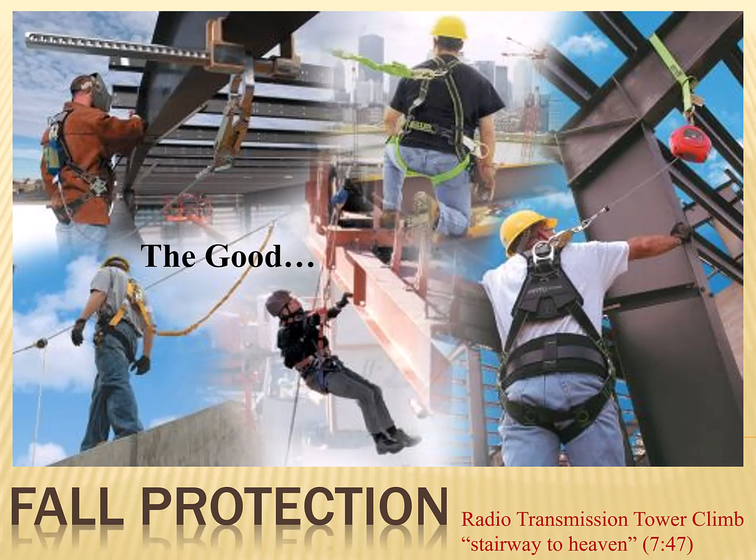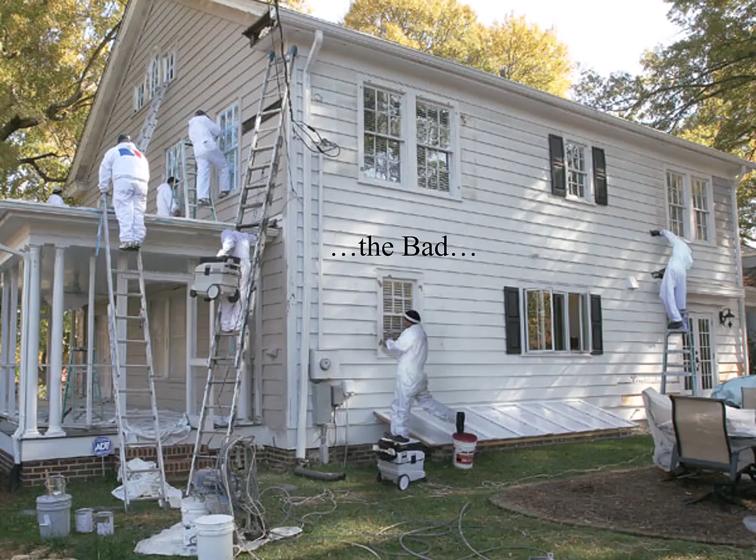Well, here we're dealing with fall protection. This first picture is showing you the good, basically proper personal fall arrest equipment being used. And here we've got places where ladders are not particularly being used properly.

We've seen this picture before, but there's lots of things wrong in this picture. We'll deal with this picture in a little more detail when we get to ladders and stairways.

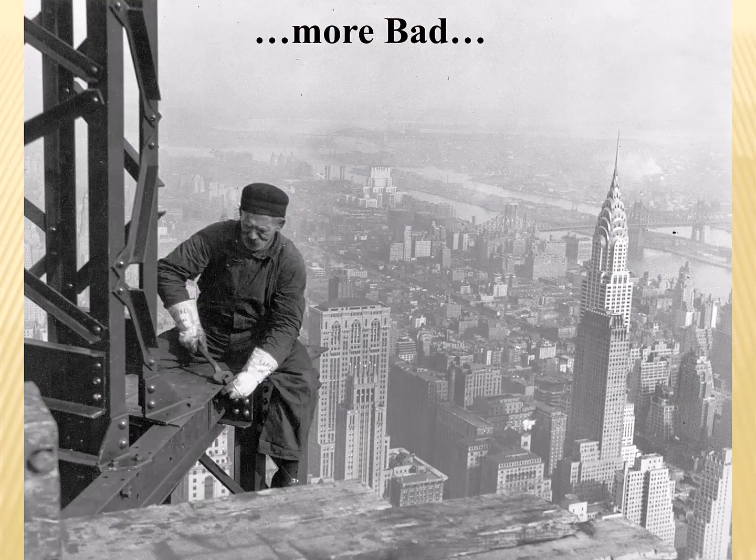But here's a fella from around 1931 sitting on a corner of the Empire State Building. And again, no fall protection, no hard hat, no real personal protective equipment beyond maybe some kind of basic boots that I'm sure were not steel-toed, and some gloves. But ultimately, if you're working at elevation, your tool should be tethered so that if you drop the wrench, it doesn't land somewhere down below, killing somebody or hurting somebody.

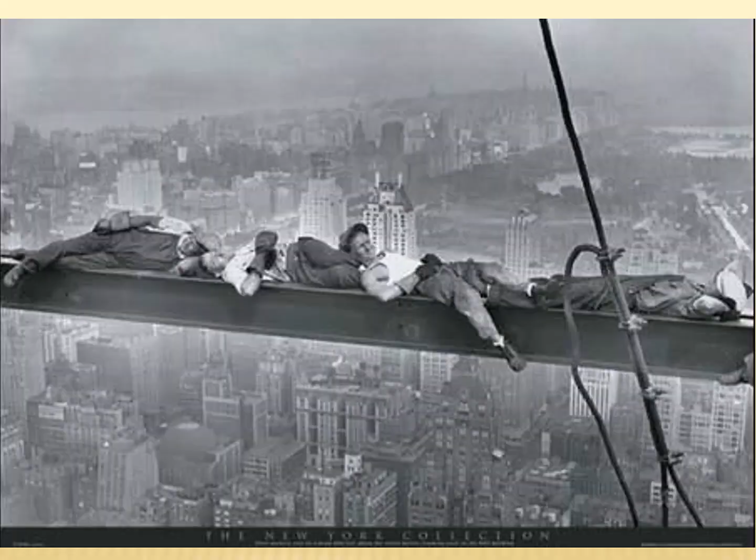But back to the people back in '31. Here they are hamming it up again by pretending to nap on that girder. But at the same time, there is no net, so there is real risk there.

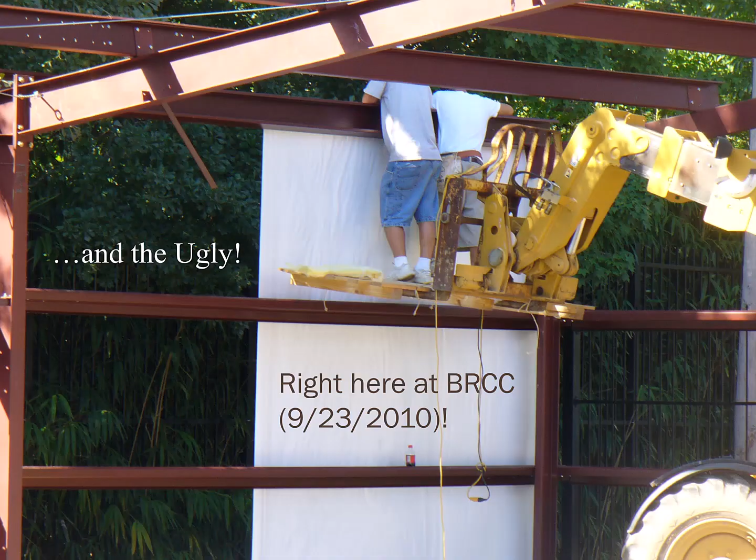Okay, so things have changed a little bit since then as far as our understanding and best practices dealing with occupational safety. But here, back in 2010, when they were building a little steel building at the south end of campus, they didn't seem to have caught any of those lessons. So they're using safety zip ties, if there is such a thing, holding that pallet on forks. That's not a proper lift for human or personnel lift, to just use a pallet like that.

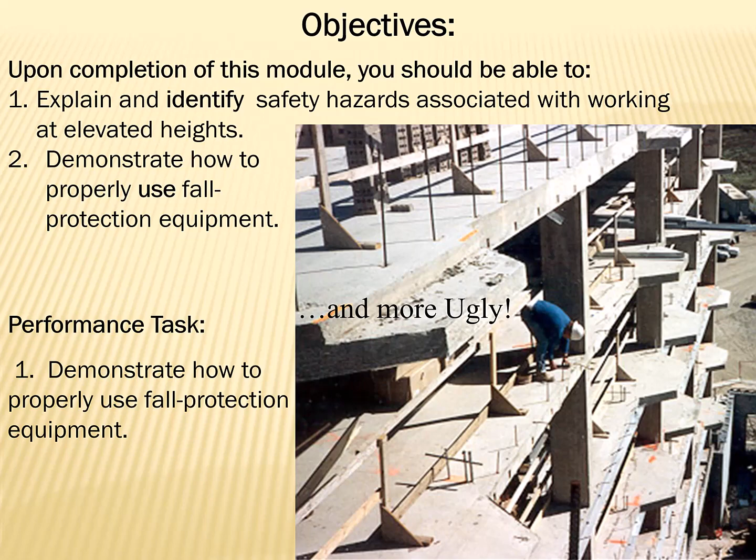And here's an OSHA file photo where someone is on the wrong side of the guardrails, but the guardrails aren't complete. The mid-rail is not installed. Maybe he took it off, for all I know, to work out there.

But anyways, falls are the leading cause of fatalities in construction. These are the top four types of classifications of fatalities in the construction industry, where falls are more than a third, at about 35% of the fatalities in the construction industry every year.

Being struck by an object or something, that's about 10% or so, and electrocution is third at around 9%. Sometimes they crisscross over, and sometimes electrocutions are second. But generally we consider struck-bys to be second, electrocutions to be third, and then the distant fourth is caught in or caught between.

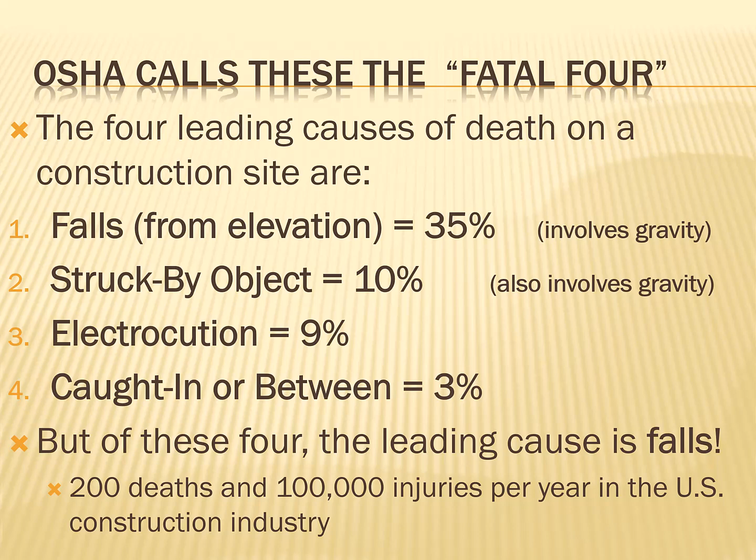So we've talked about the struck-bys and the caught-in-betweens already. Now we're going to falls. So that's the theme here. Related to falls, we'll also deal with ladders and stairways, and then scaffolding, because they're related to falls or working at elevations. So we'll move to that topic after this. But first of all, dealing with falls.

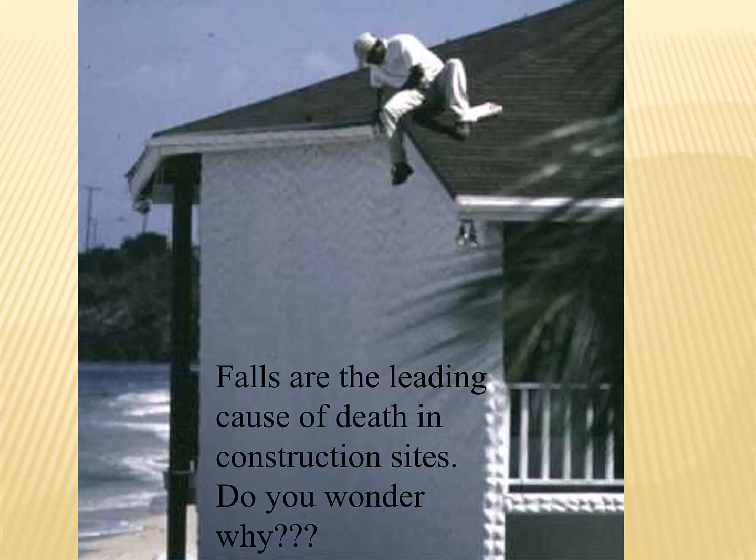So this fella, and I've done it, I've been here before, where you get up on a roof, you usually need to get somewhere to do something at the edge, but he's relying completely on the friction of his butt with that roof. And that's just not a good situation to put yourself in. You've got no way to stop yourself if you start to slide off of that roof, and there can be grit on the roof, sandy particles from the roofing materials that literally act like little ball bearings, so you can suddenly start sliding on roofs pretty easily.

I know from experience. So most fatalities occur when employees fall from open-sided floors and through floor openings in general. So when you've got any kind of floor openings, and in residential construction, it happens all the time, where you have a floor that you frame up an opening in for stairs, a big stairwell opening. And then you finally go and build the stairs or install the stairs. But even then, you can fall through the sides around that thing because you still haven't maybe built walls around that opening or guardrails and such.

So stairway openings are a particular danger, that you can forget the opening is there and then accidentally step right through it. So we've got to put guardrails up around stairwell openings in construction sites until everything is properly built in the way it's supposed to be.

And there's other things that can happen in commercial buildings. Besides stairwell openings, you can have elevator shaft openings where you're going to put the elevator shaft eventually. You can have other kinds of openings for building services, like ductwork and plumbing, where there's openings in floors for stuff like that to pass through. And that's another place where you can fall through, or at least trip. If it's not big enough to be considered a floor opening that a person can fall through, it can be considered a floor hole that can trip you up and still get you hurt.

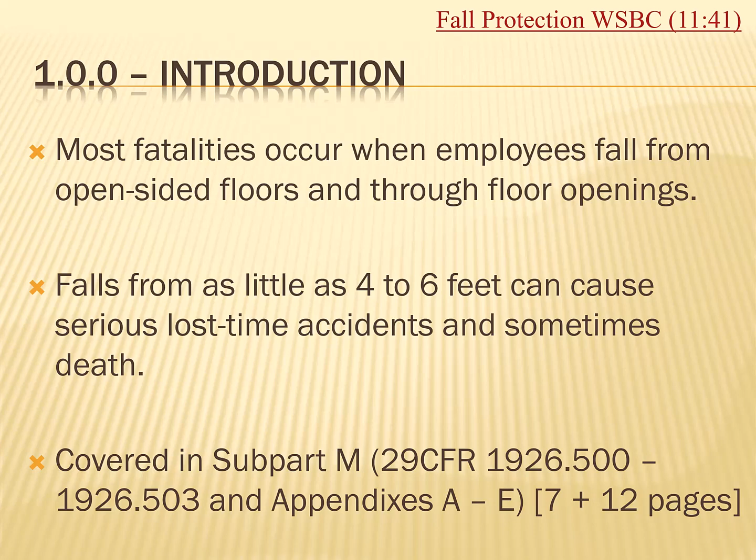It's 29 Code of Federal Regulations, 1926, because that's construction, and the decimal place is the important part to remember: 500 through 503. That only represents about 7 or 8 pages, plus maybe a dozen pages of appendices with tables and charts, so it's not a huge section, but is maybe one of the most important sections within the construction standards.

You can get somebody who was just scraping away here, doing mindless work and humming a happy tune. Maybe he was doing this on the ground floor earlier in the day, and he could literally forget that he's up on the second floor after lunch, get a little sleepy. You could literally step off that floor. It doesn't seem possible, but when you're right next to something, you just don't think.

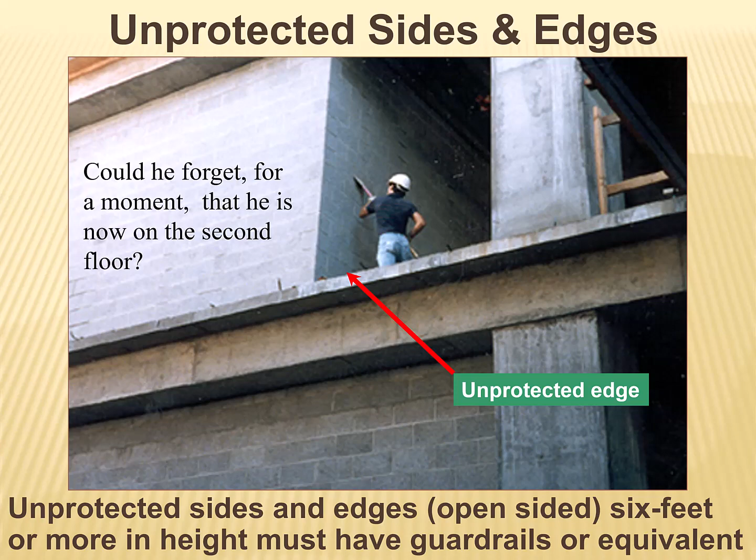So, yes or no, maybe it was the right thing to say: no, you cannot be working up here without guardrails or being tied off. He's too close to an unprotected edge.

There are a lot of sections that have fall protection notations, or special exceptions and special rules for different areas besides subpart M. We've got the steel erection section, maybe the biggest area, subpart R, which deals with structural steel erection. That's 1926.760, the main section. And those are the craziest exceptions.

If you step down two sub-bullets to deckers, you see it says up to 15 feet for deckers. They're allowed to work up to, if you're putting decking down on an elevated level as you build a structural steel building—you eventually have to put decking down—they're allowed to work up to 15 feet or one story, whichever comes first, without fall protection.

I mentioned a controlled decking zone—we'll come back to look at that again, CDZ. So when you see CDZ, that's the abbreviation for controlled decking zone. But the bullet above that little sub-bullet is talking about the connectors. The connectors are those that connect the beams and columns together to make the basic frame that the deck goes on, and they're bolting these things together, then maybe coming back and welding them.

They're allowed to work up to 30 feet, or 2 stories, whichever comes first, without fall protection. That's crazy talk—there's no way you can safely fall 30 feet and expect to get up and walk again, at least anytime soon.

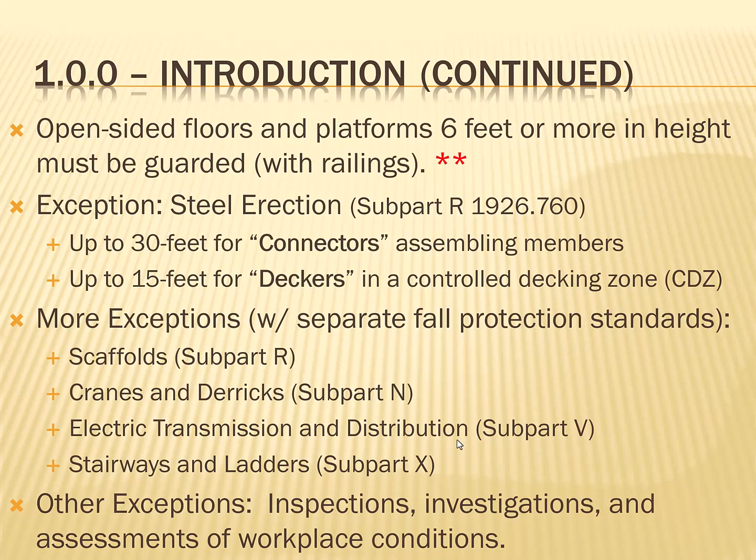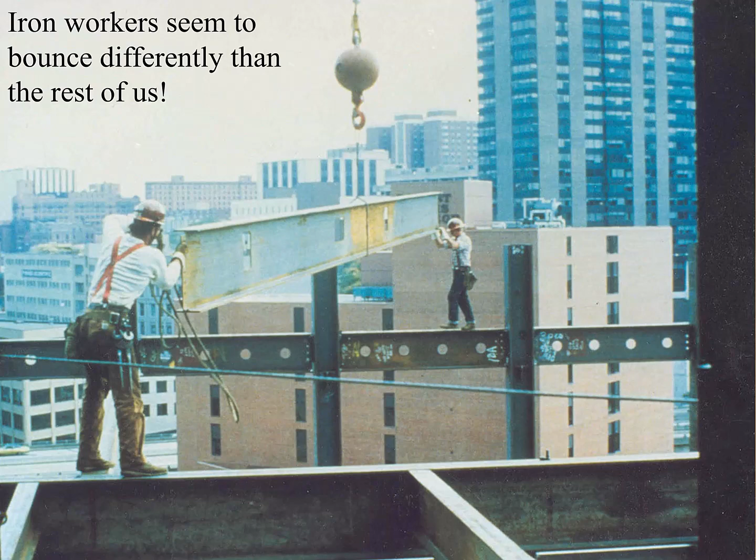Let's see, here's the next page. I'm looking at a couple of iron workers, and at first I thought they had personal fall arrest systems that just weren't connected to anything, but no, those are just suspenders holding up their tool belts. So they're up quite a ways, and they're not using any fall protection of any kind.

So you're at risk of falling when working on scaffolding, on ladders, or around leading edges, probably of decking. Typically when installing decking, the edge where you keep adding more sheets of corrugated steel decking or plywood sheets on a residential roof or deck—that's the leading edge. Or with ramps and runways: you start at ground level and gradually go higher, and next thing you know you're at an elevation where a fall could hurt you or worse.

Floor or wall openings become a hazard, as we talked about a moment ago. Roofs you can fall off, or openings in roofs, for instance—just like floor openings, there can be roof openings such as where the chimney goes. You don't have a chimney to begin with; you typically have an opening for the chimney, then you build the chimney up and out. There can also be excavations: you start with a field that's nice and level, and once you dig a hole, you've got a place you can fall into.

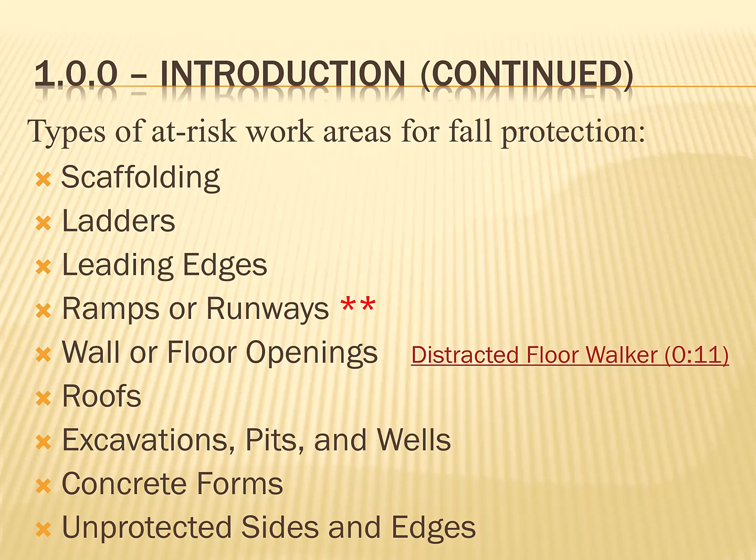Or pits or wells. Concrete forms are a common issue needing fall protection. Tall wall forms—if you've dealt with little curb forms for slab on grade, you're not at any elevation. But when you start building an 8-foot, 10-foot, or 12-foot concrete wall form, you've got to get up there with scaffolding to pour the concrete. But on plenty of residential sites and some commercial sites, people climb up on top and walk like a circus act on the wall form to pour concrete, kind of hanging onto the concrete pump or something.

Here's a ramp, and as you climb up, this one has a proper toe board, top rail, mid rail, and toe board on it. For a construction site, this is acceptable. It might not be acceptable for the general public, but for people working on construction sites, OSHA's basic rules allow this.

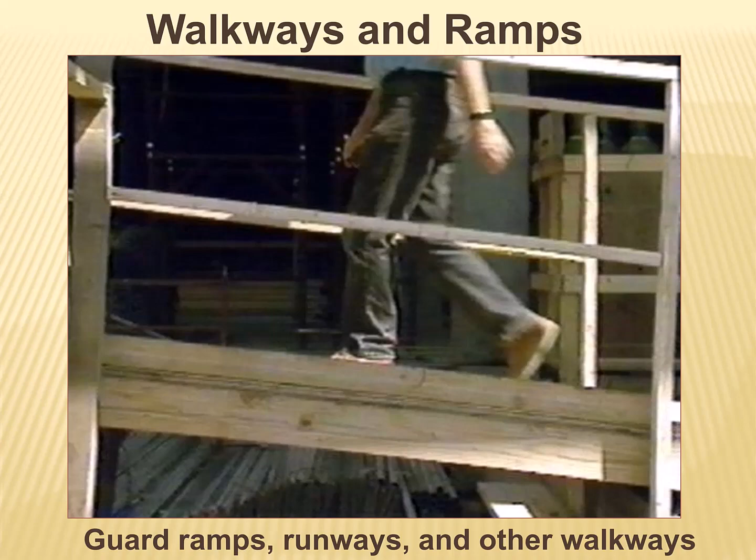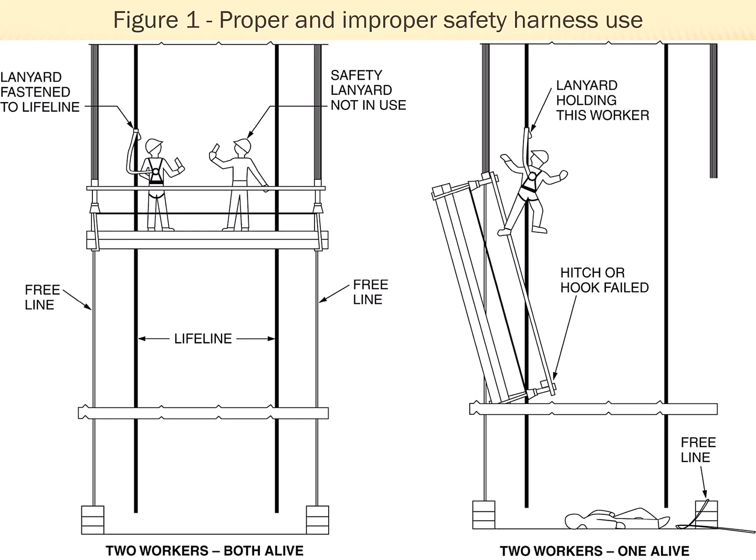That's shown in this little drawing. What I'd point out is it actually happened here in Baton Rouge back in 2013 at Our Lady of the Lake Hospital. They were building this tower you see here in the background, installing some windows still, and the suspended scaffolding they were using to install the windows failed on one side just like that.

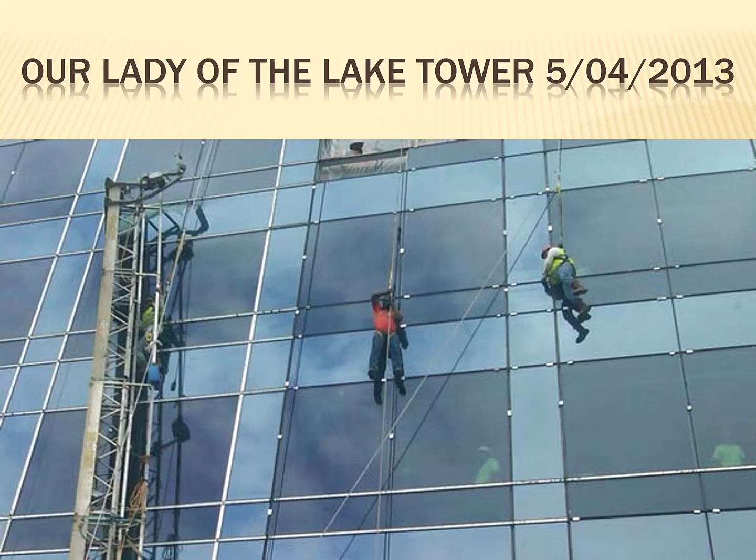So here it is, you see it dangling. You don't see any people because this is the last picture they took after they rescued the three people who were on this. Here's a picture of the three people - two are out in the open, dangling on their lifeline, their lives saved because of the personal fall arrest system, the safety harness, the lanyard attached to a lifeline rope. The third person is tangled up, able to be a bit more comfortable standing on portions of what's left of the suspended scaffolding.

I'll talk about this in more detail when we get to the scaffolding section. But one thing I didn't notice for a while when looking at these pictures is their buddies are peeking through the windows at them from inside the building. I didn't notice that until later - you can kind of see them all peeking out here. But anyway, they were all saved.

There's something called suspension trauma. When you're dangling in a safety harness, the pelvic straps tighten up on your legs kind of like a tourniquet, and toxins can build up in the pooled blood in your legs and clotting can happen. You're particularly at danger once they rescue you, where suddenly that blood can flow through and cause a stroke or shut down organs and all kinds of things I can't know more details about since I'm not a medical professional. But suspension trauma is a very real and serious thing.

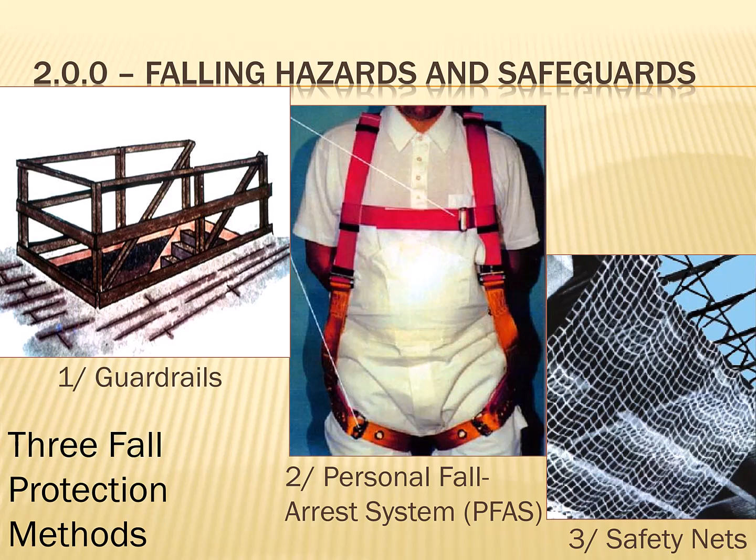So let's look at guardrails first. The standard height of a guardrail is 42 inches - you need to know that number. The mid-rail is half of that, so 21 inches. The toe board needs to be right at the ground, within an 1/8 inch really, no gap - you want it tight to the ground. Toe boards must be at least 3.5 inches tall, which is the height of a 2x4 laid on its side, I guess you could call it the height.

These guardrails have to be strong enough that you can push or pull at the top rail with a force of 200 pounds and nothing comes apart. Remember a few moments ago I mentioned how when you're tied off for support, you must be tied off to something that can support 5,000 pounds for each worker attached to that tie-off point. Meanwhile, I'm talking about 200 pounds here - but if you actually try to push on a wall with 200 pounds of force, you'll be surprised how hard that is to do.

Pulling, you might be able to do it if you can push against something and pull. You might be able to pull something apart, but even that's a significant force. So it's a stronger force than it might initially seem.

Now, this open guardrail system is only meant to protect you. If there's people working down below you, then this needs to be screened in so that there's no openings, no holes in this guardrail. And all your tools have to be tethered, tied off in a way where they can't drop on somebody below. Materials included, tools and materials.

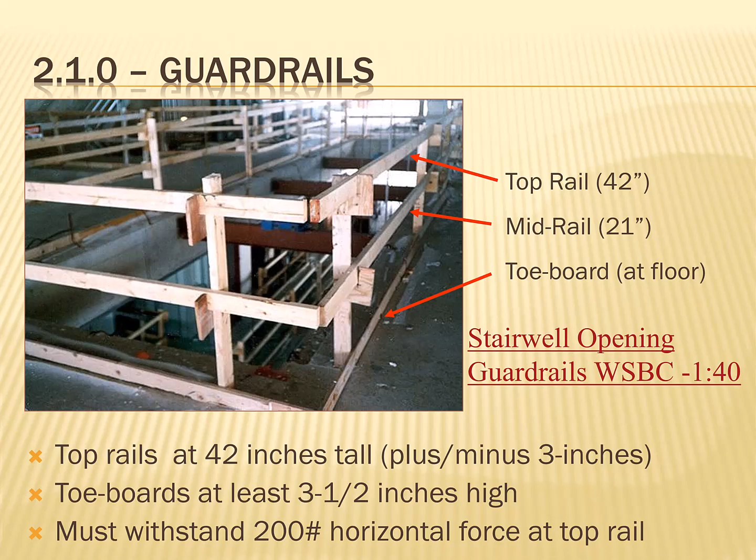Okay, so here's an unprotected edge, and this guy cannot be working on this deck. Now, I know I would feel quite comfortable to work on this deck. You're very comfortable with heights, but sometimes you can be irrationally comfortable with heights. From your experience of just never having any trouble, but it only takes one bad day, one bad moment where this guy forgets where he's at and steps off that edge.

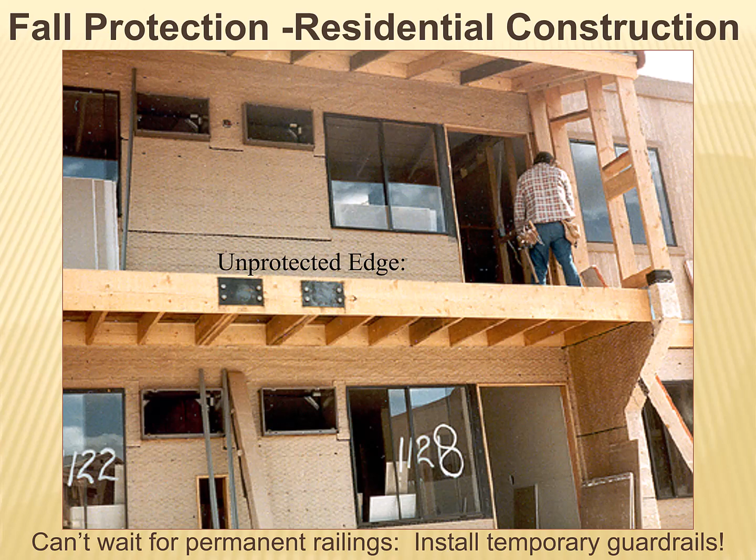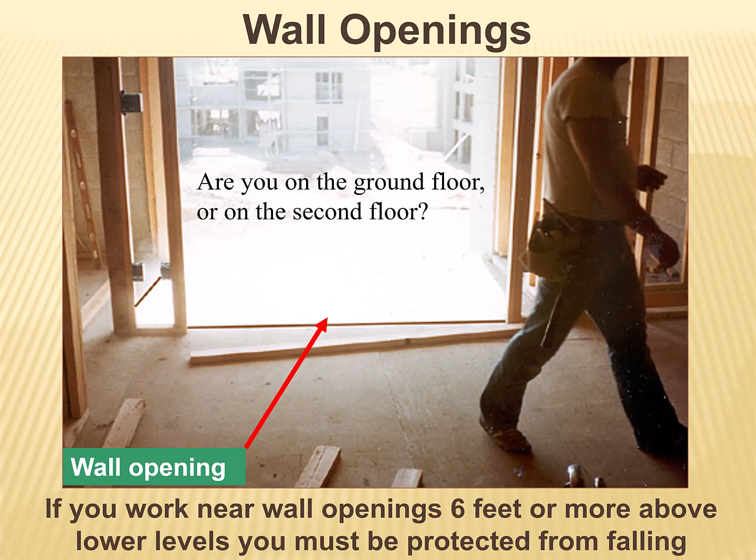Because, you know, if he's inside, you look at this, you might have been on the ground floor all morning and you get upstairs on the second floor now, and with the glare on your safety glasses and stuff, you may still think you're on the ground floor and forget that you just climbed up. All the apartments look the same, you know.

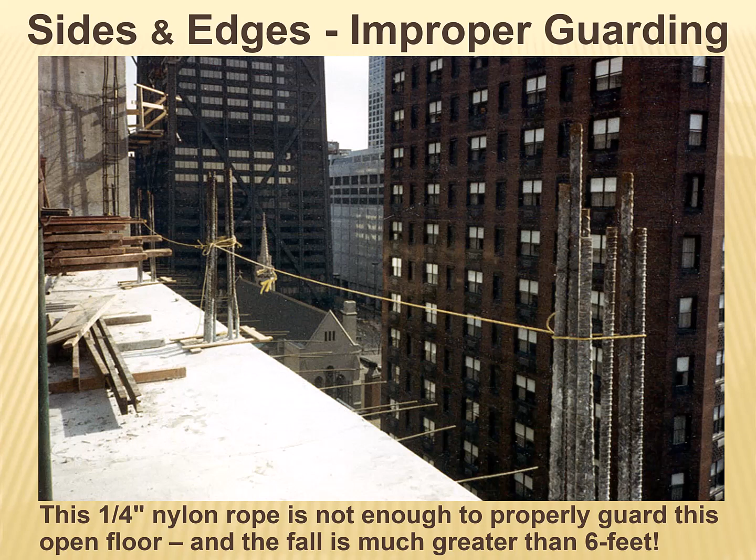Okay, this is an OSHA file photo where OSHA didn't like this 1/4-inch nylon rope being employed as a guardrail. It's a long ways down, and that's not really a guardrail at all.

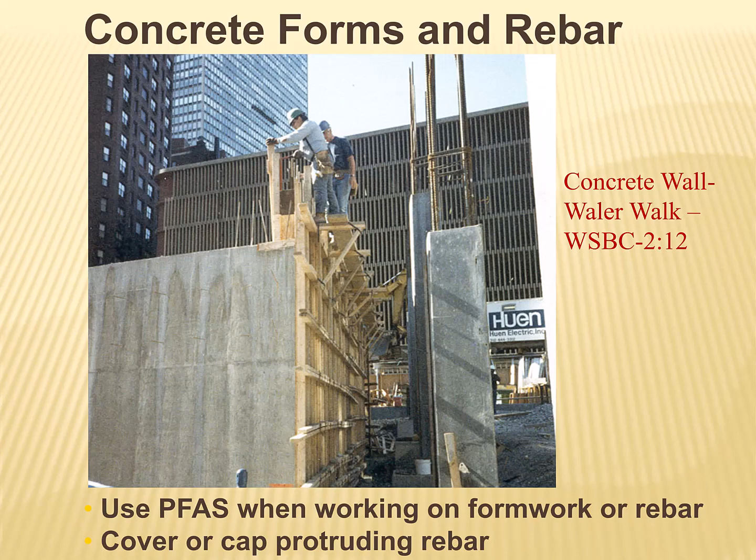And this wrinkled the brow, I guess you'd say, of an OSHA inspector, because this is not a proper scaffolding system. Yes, it looks pretty good compared to some kinds of things that I've had to climb on for concrete forms in my youth, but no, it's not considered effective guardrails. There's something to hang on to maybe on one side if you're lucky, but it's not adequate.

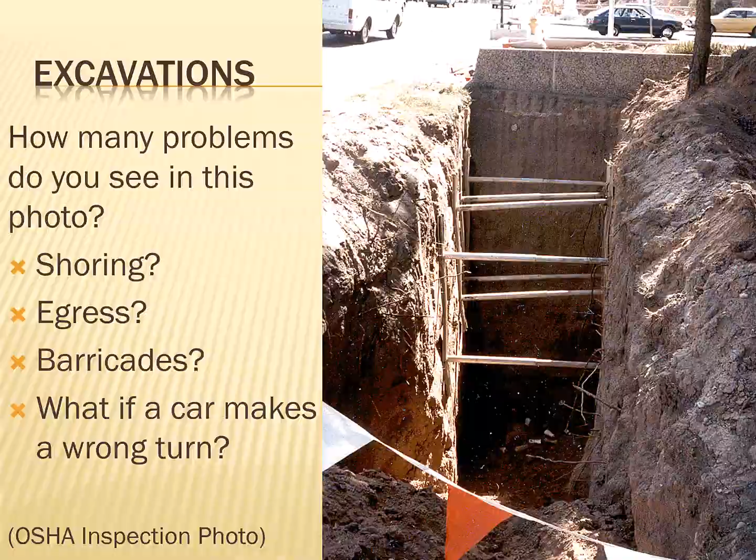So, no guardrails here either. Now, it used to be that a personal fall arrest system included body belts, and they're still in the category, and they can still make them and sell them, and people can still use them, but only for fall restraint.

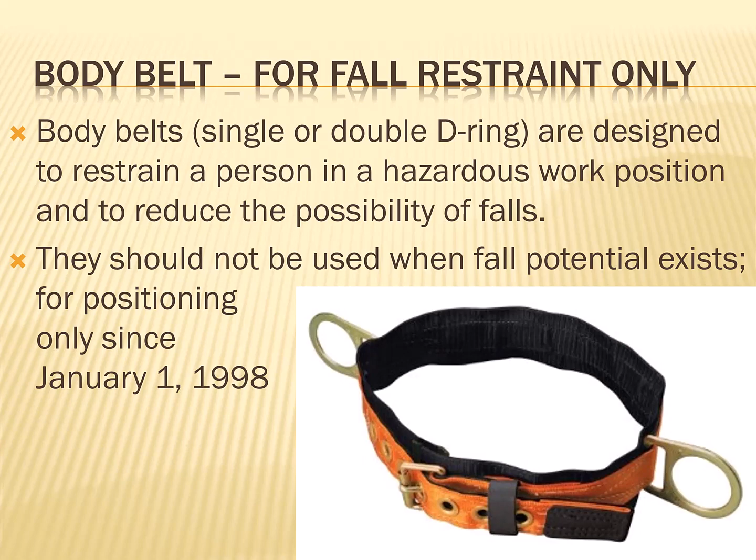It's not something that you can use to protect somebody from falling. The actual fall protection has to be a full body harness like we've been seeing in some pictures here. And I'll show you something here.

And in both cases, they have bundled up webbing that they stitch together, and that becomes a deceleration device. It's meant for a single-use fall. You fall once, then you need to replace that unit, that lanyard. In fact, if you fall once, all of your gear has to be replaced. It's a single-use item for falling and supporting weight.

But it's designed so that the belting or the webbing of this synthetic strap will unstitch as you fall, and so it slows you down rather than coming to the end of a chain where it's going to be so much blunt force on your body that you'll be injured.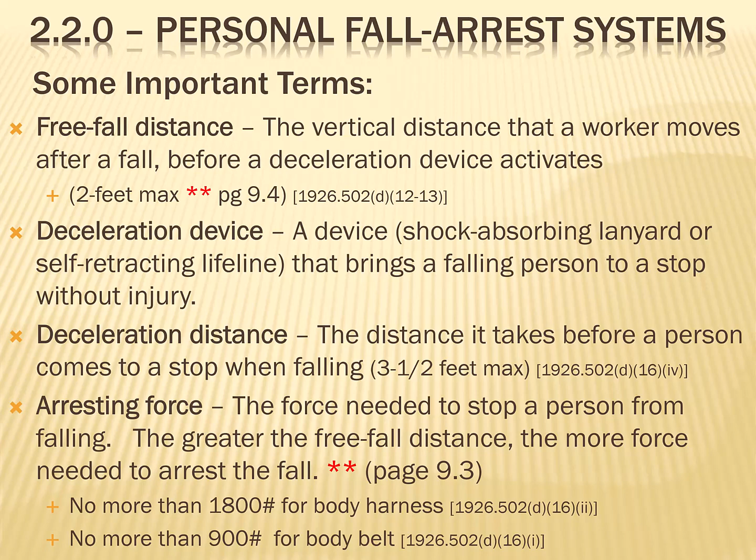For instance, back when we looked at the suspended scaffolding pictures, you could be tangled up in that superstructure, so all the weight of that structure ends up on your lifeline. That's why we have a 5,000 pound rule. When I first got into the safety business, the rule used to be 3,000 pounds a couple decades ago. They changed it to 5,000 pounds because 3,000 wasn't enough. There were people dying that aren't dying anymore because we have the 5,000 pound rule.

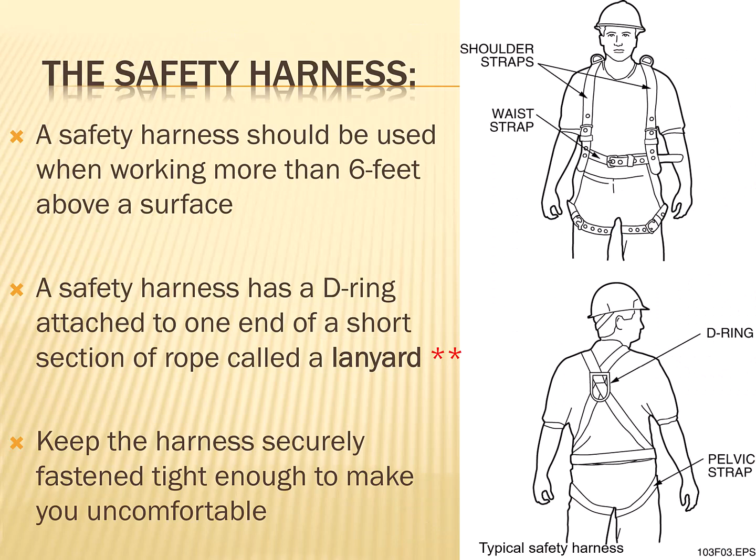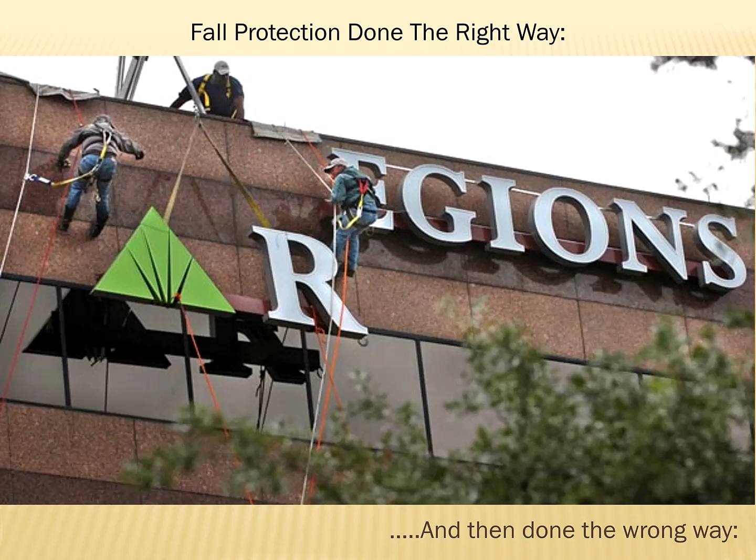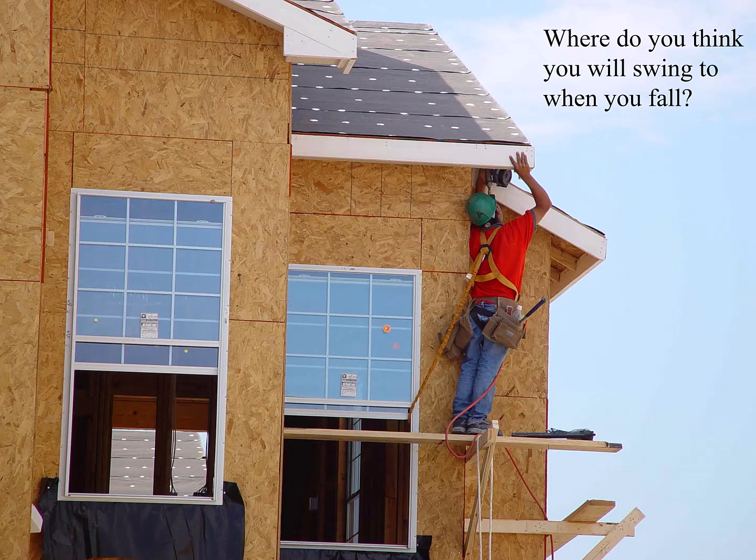Here he is actually at work, and you can better see that D-ring and the process. At the same job site, his buddy at the other end has the same nail gun holding technique, and his chest strap isn't even connected. He's tied off to this white rope dangling on the ladder he's standing on, and that rope is tied up to a 2x4 that's fairly high up.

But because there's so much rope here acting as his lanyard, or lifeline, he's likely to hit the ground before it even tightens up. So, there's no way he's supported by 5,000 pounds with that 2x4 his rope is looped over.

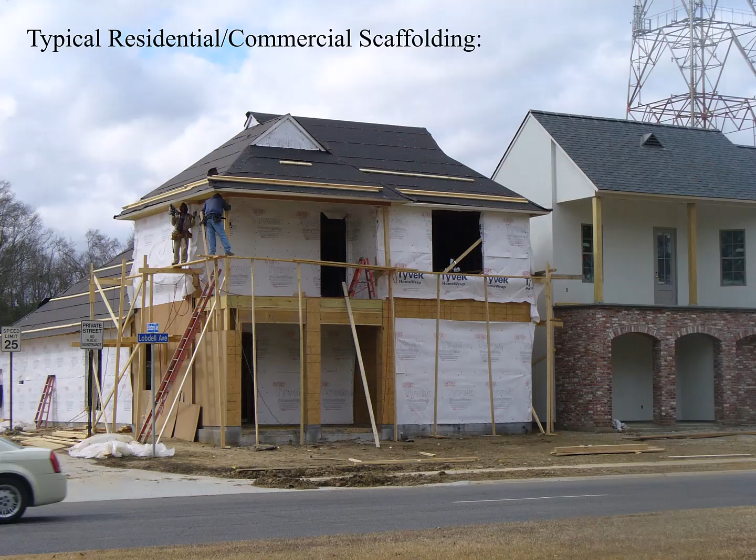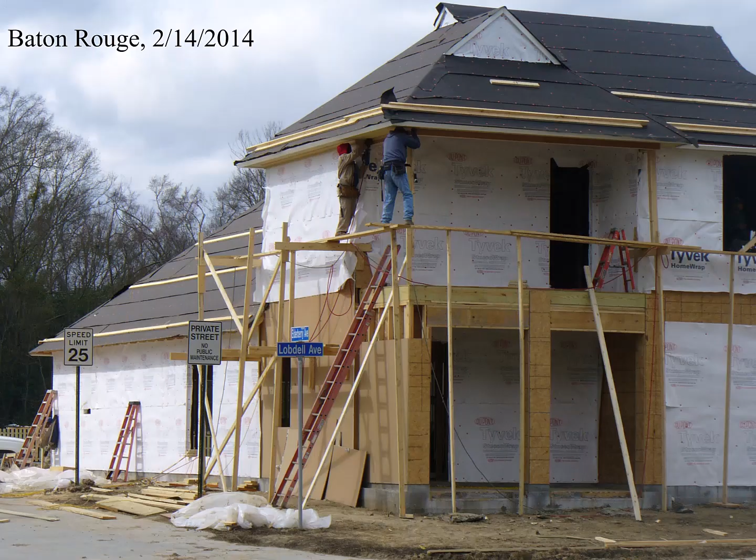It's just a decoration. This next picture, they got the buddy system, so that's not ideal. I was taking this picture one day, meaning to photograph all these houses in this little subdivision beside Independence Park on Lobdell. They were all done this same way, up like 14 feet in the air with no fall protection, and that's not really proper scaffolding. It's basically some 2x8s or 2x6s supported by a bunch of long unbraced 2x4s. It's just crazy. As far as I know nothing bad ever happened to them, but it's not a proper system.

I didn't notice this guy was waving at me later, until I saw it on the computer.

A personal fall arrest system - you need to remember this abbreviation, PFAS, because you could get a test question that comes up that way, and you have to know what it stands for. Personal fall arrest system includes the body harness and belts, lanyards that connect to the body harness, and deceleration devices, which could be that same lanyard, or the self-retracting lifeline. Some kinds of rope are also classified as deceleration devices depending on their length. If you're tied off to a rope grab system with a long rope lifeline, there can be a certain bungee cord effect that allows you to decelerate. The anchoring device, whatever you tie off to, is part of your personal fall arrest system, so you've got to select an anchor point that's effective. We can call an anchor point a place you're tying off to - a beam, a column, a hook of some kind. It could also be called a tie-off point.

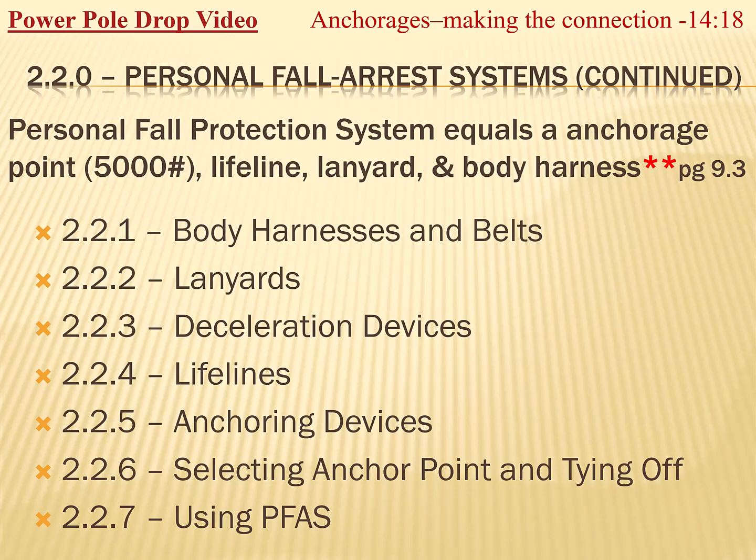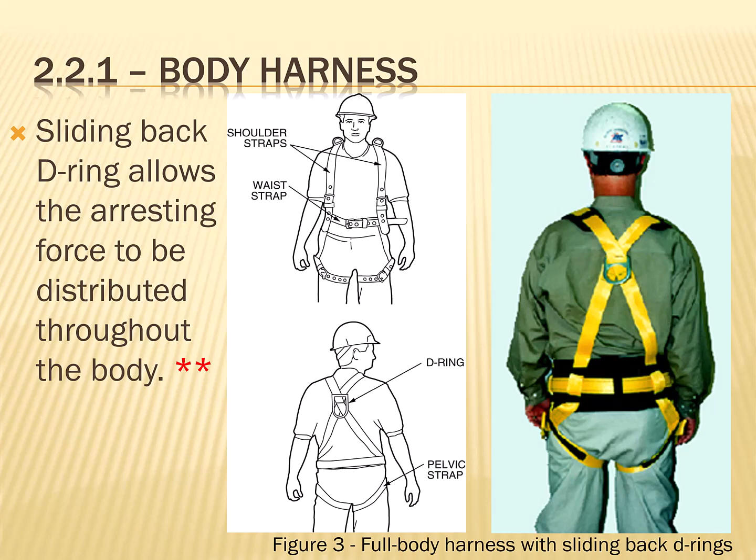So we've seen these pictures already. The sliding back D-ring allows the arresting force to be distributed throughout the body through all of those webs. You basically have about a 4 or 5 point harness, depending how you look at it in this picture, distributing that weight throughout your body. And the lanyard - every component within your personal fall arrest system has to be able to support 5,000 pounds, or a 5,000 pound tensile strength, as they sometimes say.

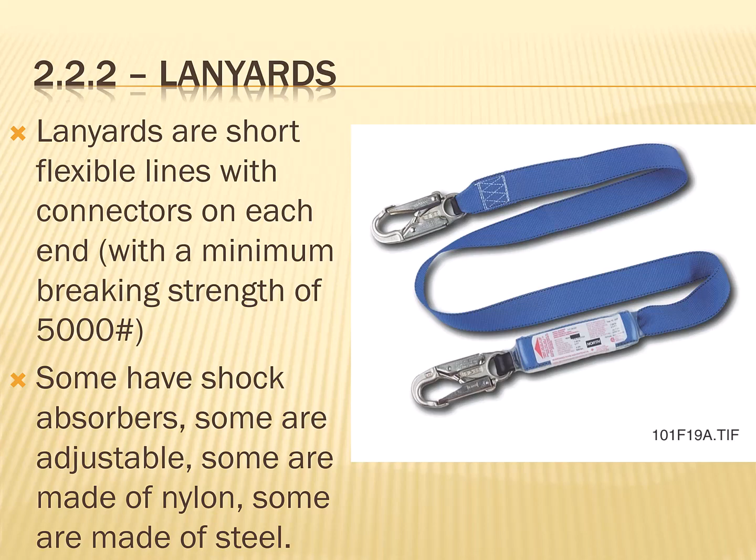Amazing - when I pull out my camera on these job sites, I'm careful to stay off the property, but I've got a good lens, and sure enough, I got about 3 pictures in before they were all gone for coffee break real quick. And the superintendent came to ask me if I could help him. He had this great big sigh of relief when he realized I wasn't an OSHA inspector. Anyways, fun and games - when you're dressed up nice and take pictures at a job site, they fear who you are.

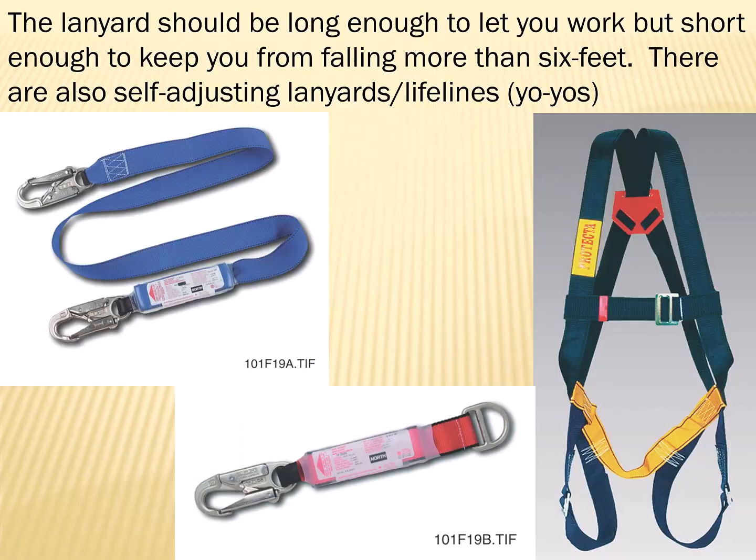So this yellow beam, I-beam, has a tie-off point that's actually on rollers, so you can roll that thing side to side and be tied directly overhead as long as he's near that beam. What's connected to that is the self-retracting lifeline system that retracts in and out as he needs the extra length, then retracts when he doesn't need it. So it stays somewhat tight, snug tight, but if you were to suddenly drop it would lock just like a seatbelt.

Deceleration devices limit the arresting force a worker is subjected to, and a rope grab is what you see on the right-hand side. That's a rope that it connects to and it locks. Those are very simple devices that work quite well as long as you have the right kind of rope and it's tied off properly. Rope grabs and self-retracting lifelines, or yo-yos, are two very common deceleration devices. And even in this picture of the rope grab on the right-hand side of the page, he's got another deceleration device bundled into the lanyard.

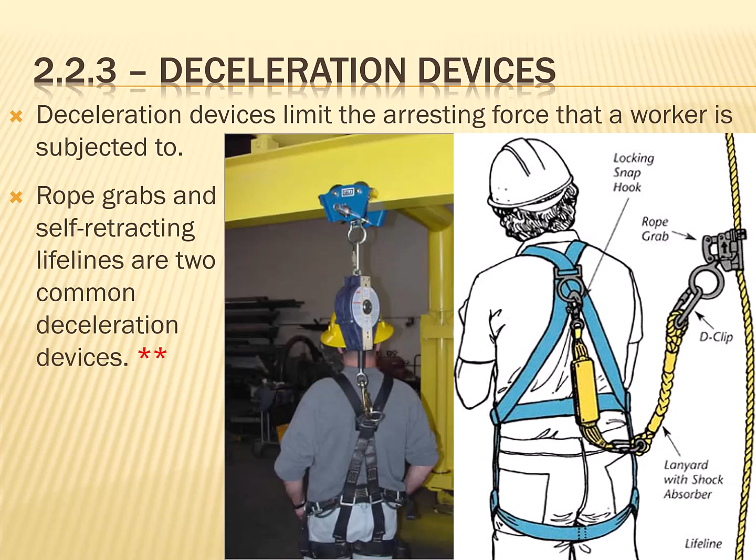Okay, so lifelines can be vertical or horizontal. Over on the left, you've got a vertical picture where it's designed to lock just like the rope grab would. In other words, it goes up with you as you climb the ladder, so that if you slip and fall on this straight ladder, it's going to lock and save you from yourself.

On the left-hand side, he's also connected to a D-ring on the front, as opposed to the D-ring up at the back of the harness, where you normally connect at the back between his shoulder blades. He's connected to a front one.

You are allowed to do that when you're climbing vertically with a vertical lifeline like this. Or you could have a self-retracting lifeline, that yo-yo that's up at the top and pulled out so you can go up and down that way. On the right-hand side picture, you've got a structural steel building where they very commonly put a couple of cables going through the steel columns, made high and very tight, so that it gives you your top rail and mid rail. Behind him is a wood structure they often use that butts up against the back of the columns, and that gives them a toe board system.

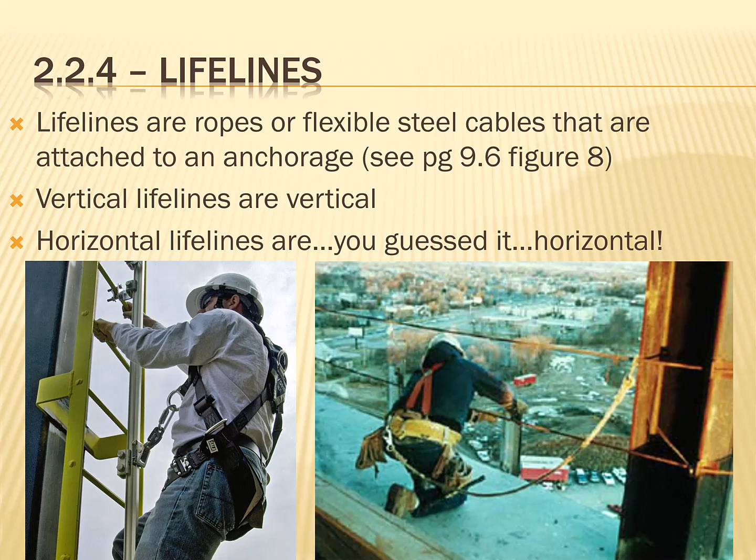Anchoring devices, commonly called tie-off points, support the entire weight of the fall arrest system and the person being held on it. You've got to make sure that whatever you use to tie off is reliable for the application.

You see the synthetic strap on the left-hand side has a protective strap that's part of it to keep it from getting sliced. You can't just take nylon rope and strap it over a beam. That edge of the beam can be sharp enough when there's enough force on it to slice through. That's something that without a little bit of experience, it's hard to imagine. But when I would try to pull people out of a snowbank with nylon rope, if there were any sharp objects at all tied to under the car up in Canada, that rope would slice.

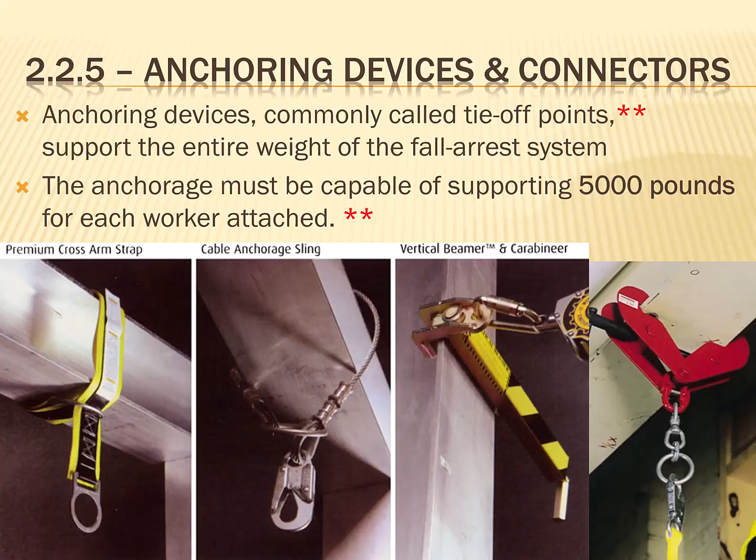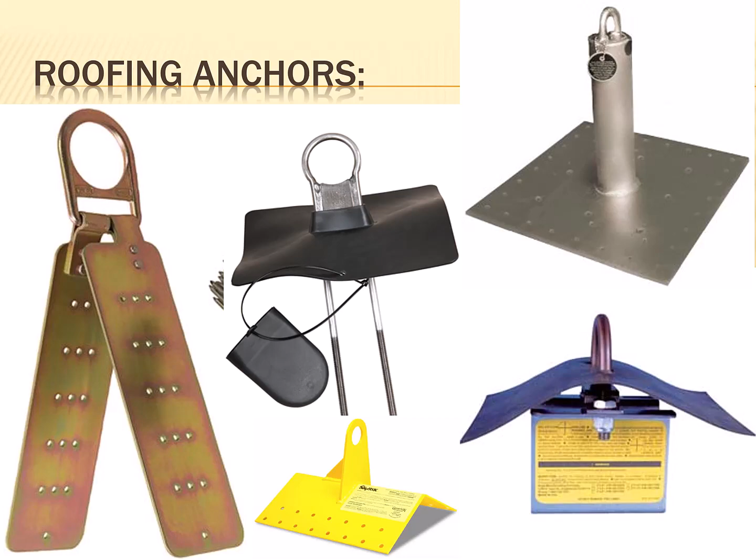I think every building should have a tie-off point that's permanently part of it. That would probably have to be made of something like stainless steel or a high-strength steel, since it doesn't corrode much either. What you see on the left-hand side of this page is a temporary device meant to be screwed down to a roof system up on the roof, and you're supposed to put a screw in every single hole on that one.

Selecting the anchorage point: it should be directly above the worker, not way over the side, no more than 2 feet away horizontally. It should be easily accessible, damage-free, and capable of supporting 5,000 pounds per worker attached to it. It should be high enough to keep the worker from striking the lower level, and it should be separate from the work basket tie-off.

So what does that mean? Well, if you're coming up to some elevation in a work basket, some kind of extendable lift, you're tied off to the work basket while you're in there. When you go to climb out of there onto the roof, you have to tie off to a separate tie-off point on that roof system instead.

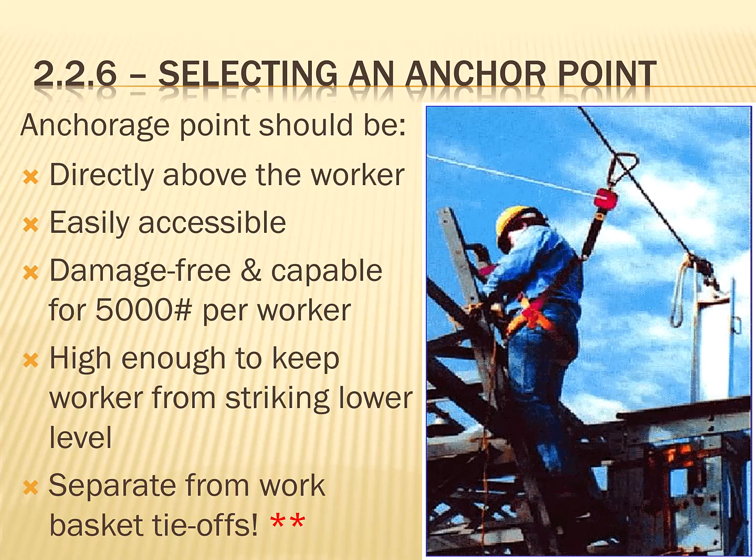That means you really have to have 2 lanyards on you. That's what the front D-rings of a safety harness are used for mostly, tying off your extra lanyard, your second lanyard, so you've got it handy to connect onto somewhere. You shouldn't have to disconnect your only tie-off from something to connect it somewhere else, because for those moments you're not protected. That's why it needs to be separate.

Safety nets. Now we're talking about safety nets. They should be installed as close as possible to where you're working, so you don't have to fall very far, right? But no more than 30 feet. 30 feet's a good long distance - on a lot of houses, that's 3 stories of a building. So no more than 30 feet beneath the work area.

But best practice is to have it as close as possible. Depending on the actual vertical distance from you to the net, it should extend out beyond the edge of the building or structure to catch you, 8 to 13 feet beyond the edge, depending how far below. If the net's only 5 feet below you, the arms can extend only 8 feet. But if it's anything more than 10 feet below, then you need to have the arms extended 13 feet. Now the other thing you need to remember is the mesh openings on these nets.

The maximum dimension of the sides of those little squares of the net are 6 inches. So a 6-inch by 6-inch square for the net size is what you should have. You can have smaller, but it can't be any bigger than 6 inches. And sometimes you'll see talk about 36 square inches, but that's the same thing - it's 6 inches on a square, 6 inches times 6 inches is 36 square inches. But the most important thing to remember is the 6-inch number.

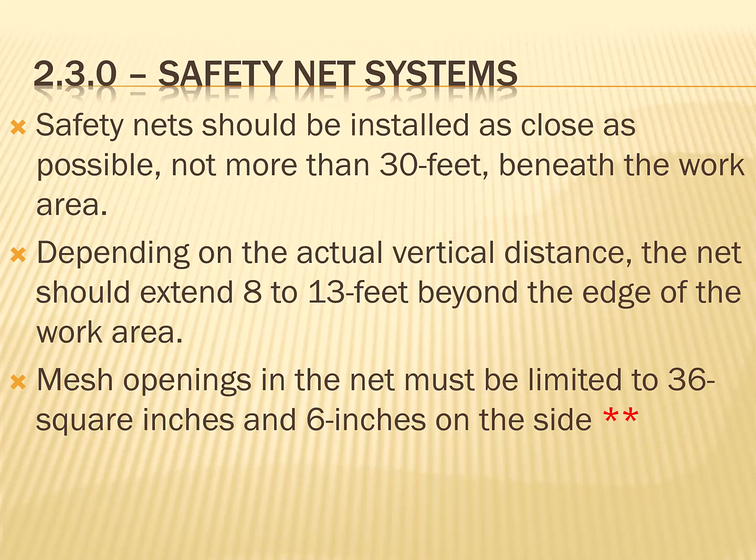Now some of these numbers, like the arms sticking out, let's look at that here. There's a table showing that. But I would like you to know that there's such a thing as a drop test that's supposed to be performed every time you set up a safety net. You're supposed to take a 400-pound bag of sand, or maybe a collection of sandbags tied together that weighs 400 pounds, and drop it into the net, just to test how strong it is.

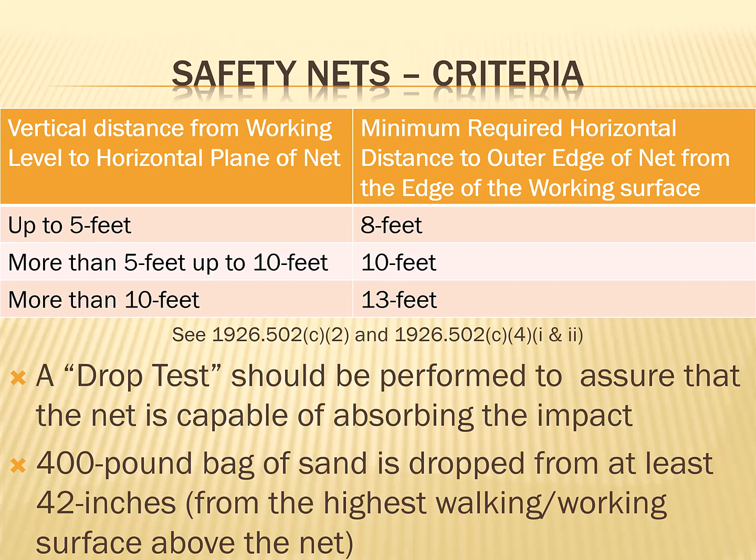And you don't want it to distort so much that the person still hits the ground. There's this hammock effect in the net - when you land in there, the net's going to go down and change shape. You've got to test to make sure it's not going to still smack the ground or something else as it's deforming as you land in it. So you're supposed to put that 400-pound test bag of sand, dropped from at least 42 inches above the net, or from the highest walking and working surface above the net that anybody could be working at.

Rescue after the fall. Well, every elevated job site should have an established rescue and retrieval plan, just like they did at Our Lady of the Lake Hospital for those guys that were dangling after falling. Planning is especially important in remote areas where help is not readily available.

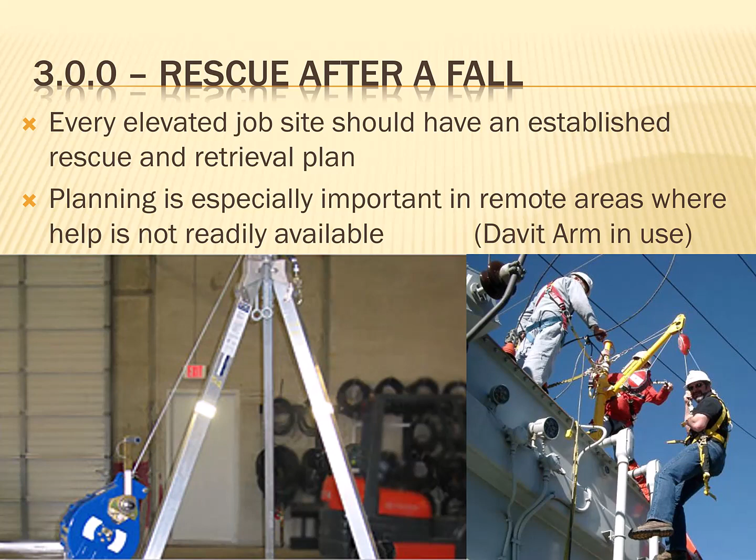So what you're supposed to really have on your site is a davit, or davit arm - D-A-V-I-T, as it says in the brackets at the bottom of the page there. It's basically a portable hoist crane system designed to be used in multiple locations so you can attach it to somebody and rescue them, hoist them up, or sometimes lower you down.

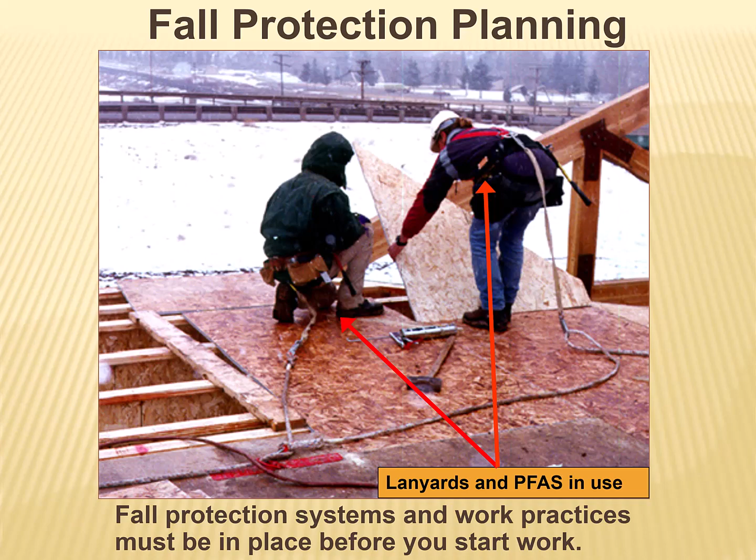So these two are installing decking of some sort. There's some safety issues I could mention here, but they are tied off to a horizontal lifeline, so that part is appropriate. If maybe the lifeline should be tighter than it is here, that could be a complaint. And then somebody decided to sit on a skylight, and this actually resulted in a fatality - that was his hat sitting out there. He literally did a somersault.

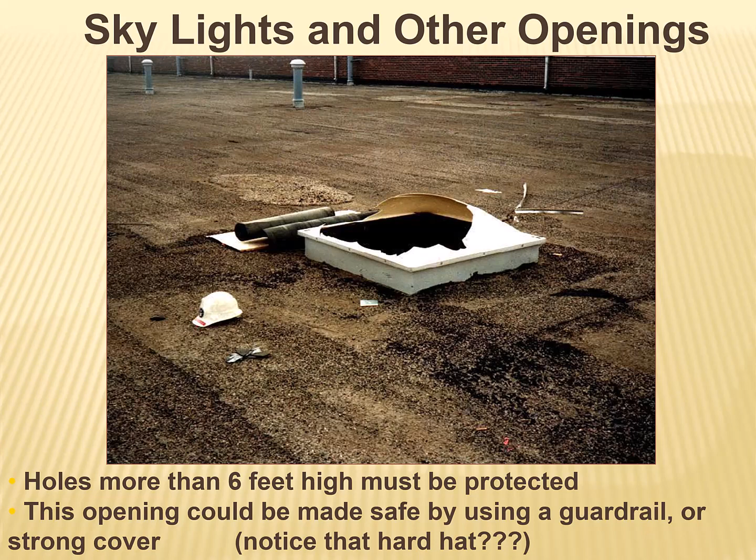One of the things about these skylights is some of them can be strong enough to stand on when they're brand new, maybe. But the sun deteriorates this plastic - these are plastic members here, you know, the skylight - and so you can't trust it, especially after it's been out in the sun for a period of time. They deteriorate and have no strength left.

Floor holes - I talked about them before, but a floor hole is small enough that you can trip and your whole leg could go in there, where the least dimension is between 1 inch and 12 inches, and we call it a floor hole. Now these edges here, because of the way the planks are positioned, would be considered floor holes. Meanwhile, a floor opening is big enough that a whole entire person can fall through, so when the least dimension is 12 inches or more, we consider it to be a floor opening.

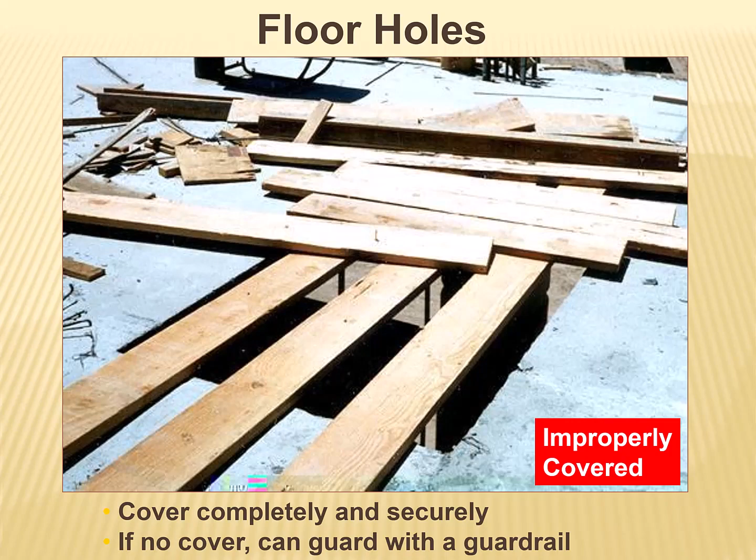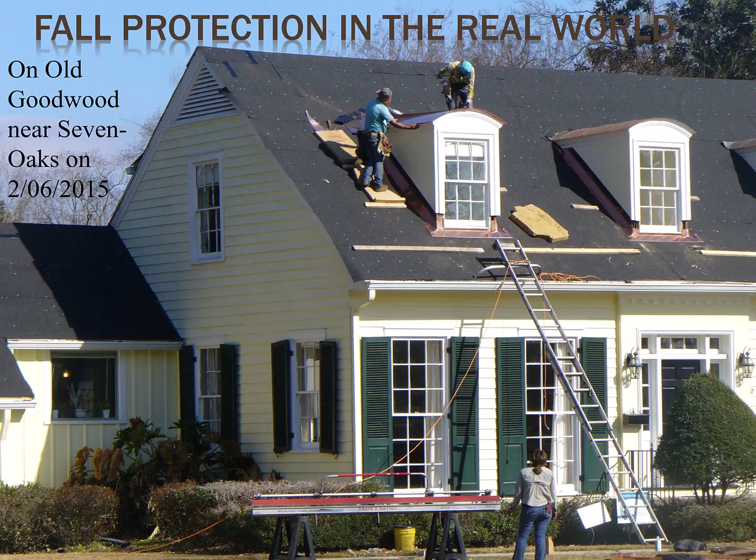Here's a homeowner down below and a couple of workers up top with their safety cushions and all. So there's another picture I took right from the truck. Didn't even stop and park or anything.

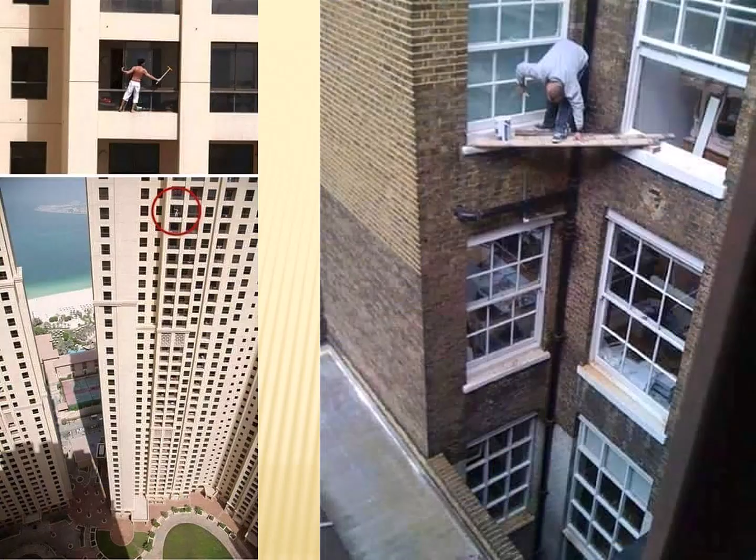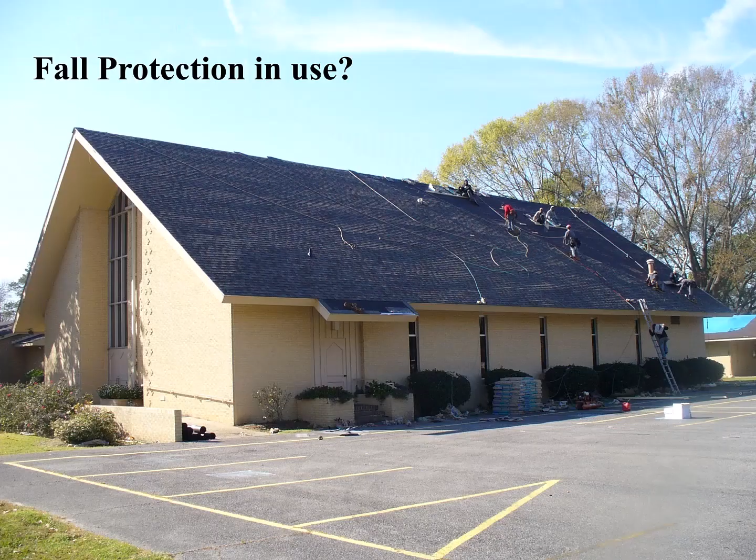Anyways, here's something I've maybe shown in a couple of different presentations, but it's about a 12-12 slope on this roof, I would say, is my guess. And so it's pretty steep. You can see there's a guy on a ladder climbing with a bundle of shingles on his shoulder, and there's no safety harnesses on this job site.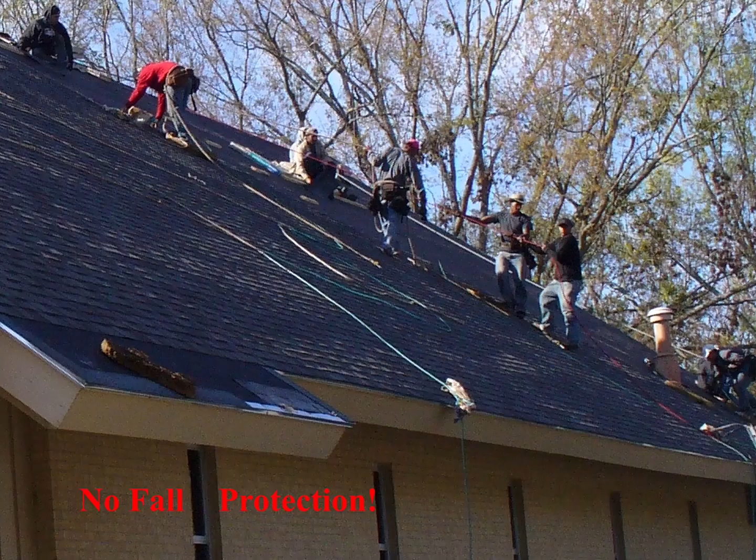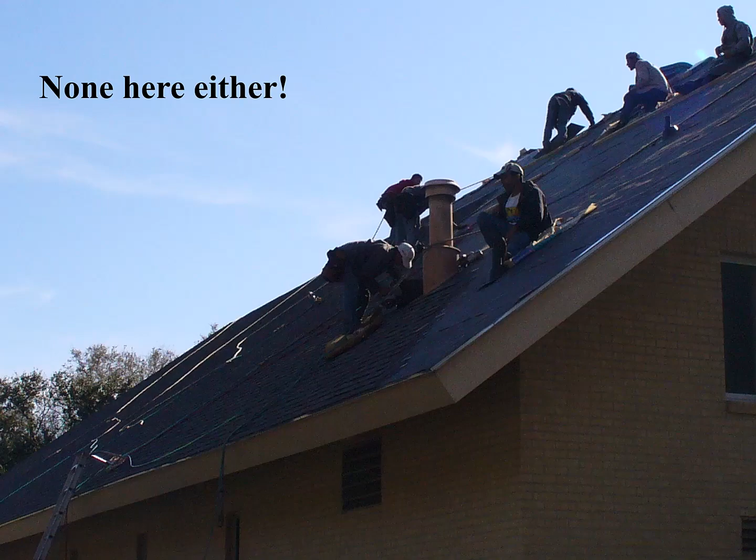There's ropes that are tied to the roof peak, though. So as he gets up on the roof and everybody else, they would hang on to these ropes. So yeah, they're all hanging on the ropes while they do the work. But that's not considered an appropriate fall arrest system or fall protection system of any kind. And yet nothing goes wrong because they've got lots of skills too. But still, all it takes is one bad day, one bad moment, and you're off that thing.

A 12-12 roof is really a self-cleaning roof. The leaves can't stay on the roof, and neither can roofers without a lot of effort.

So I mentioned how there were classes of fall protection. Class 1 is all listed here. That's the regular body belt that's not allowed to be used for anything but fall restraint, positioning only, not for protection. So it's kind of like a dog on a leash, kept from getting somewhere where the dog can get hurt.

Class 2 is meant for rescues. It's a chest harness that you can put on somebody when they're unconscious or hurt, and you can still rescue them that way. So sometimes they are used for rescues.

And then class 3 is the regular everyday body harness that we mostly use in construction, but it's only designed for falls, not for supporting your weight while you work. And then the class 4 harness is the suspension harness that can actually be used to support you while you work and for fall protection.

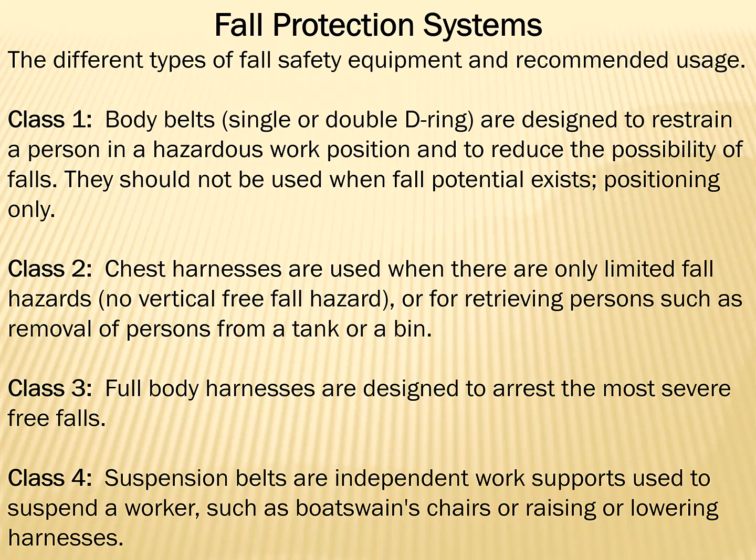Okay, there's a couple other terms in here, but I guess I can skip past that. And all this has been pretty much defined.

So there's some team-based fall protection. Get your buddy down there to dangle to paint that last little bit in the corner.

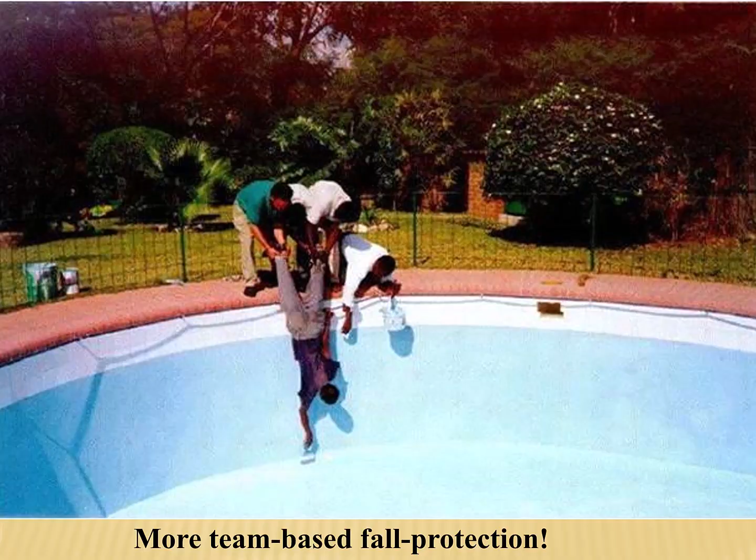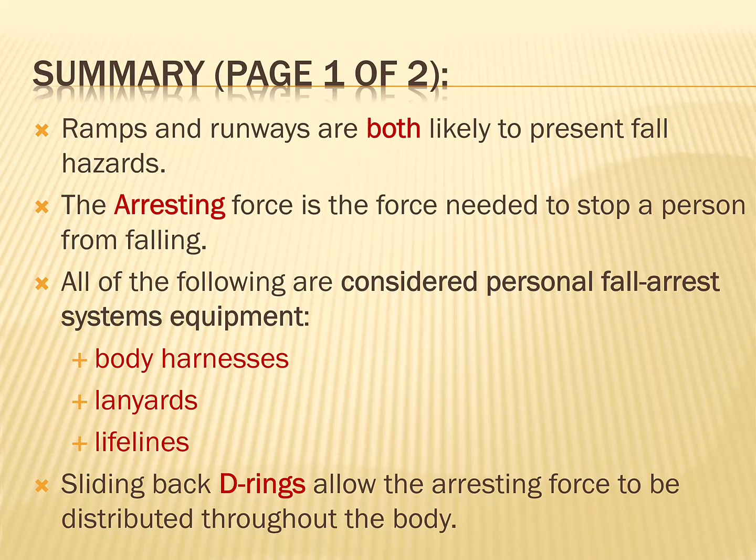So with that, I've always got this summary at the end of these presentations. Ramps and runways are both likely to present fall hazards. Remember, the arresting force is the force needed to stop a person from falling. All of the following are considered personal fall arrest system components of the equipment: there's the body harness, there's a lanyard, there's a lifeline, and the sliding back D-ring allows the arresting force to be distributed throughout the body.

And then over here, a personal positioning system should not allow a worker to fall more than 2 feet. Again, every time there's a number, you've got to make sure you really know that number and its context. The second bullet here: two common deceleration devices would be rope grabs and self-retracting lifelines. The next point: an anchoring device is often called a tie-off point.

And the next bullet down: D-rings must have a minimum tensile strength of 5,000 pounds for each worker attached. And then the next one: it is not safe to make an anchorage point the same as a work basket tie-off. And the last bullet here: mesh openings in a safety net are limited to 6 inches on the sides, so 6 inches by 6 inches in those squares.